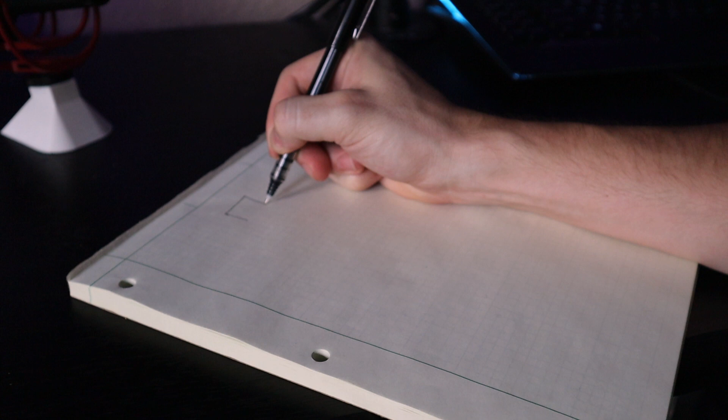So I'm going to want the mount to look something... well, I'm going to want the mount to be articulating, so the panel, I'll just model it off of like a wall-mounted articulating TV mount. And I'll put front view, side view, and they're all connected.

And then to put a bolt through here, you can't see that at all. Okay, that's a little better. Arm to come down, and then this is going to be where I mount it to the camera.

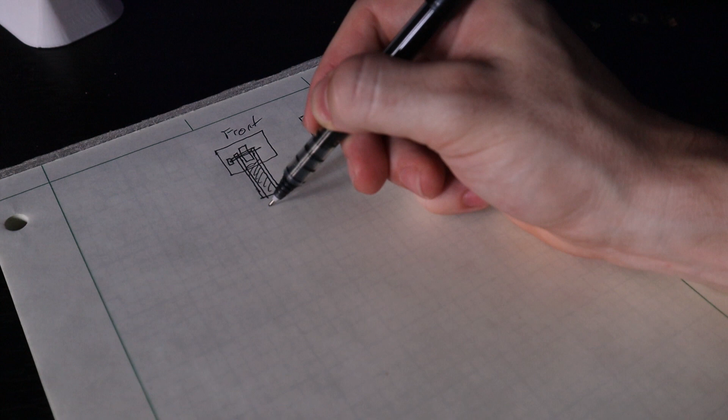And the camera mount, I want it to use the existing Canon mount that has a locking pin on it, and it has quite a small dovetail here. And this is going to need to be, and have another, this, and then the camera itself will sit here and do camera stuff.

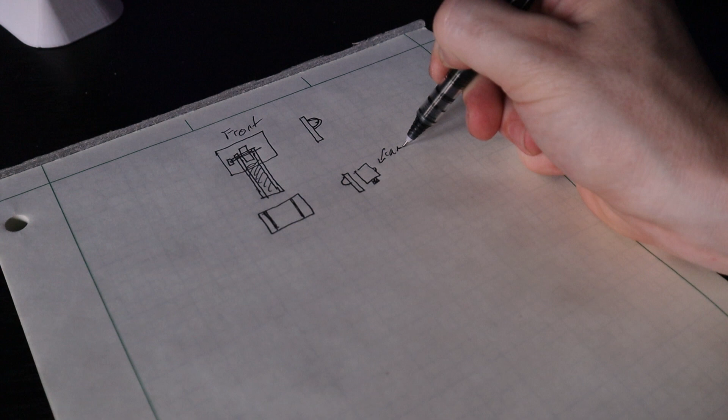I don't know if you can see that. God, I'm a bad artist. So I'm terrible at drawing, but I'm just gonna make it in CAD and I'll show it to you in 3D.

Before I get too deep into CAD, and while I still have some sunlight, there's a few things that I know I'm gonna need for sure. If I'm gonna have an arm and another arm that are gonna hinge, I need the...

So this is what I want. I want it to stick on the wall on this side, and then this be able to swivel here, and this top be able to swivel, and then right here is where I'm gonna...

It's where I'm gonna stick this mount, what the camera sticks onto. So I'm also gonna need a quarter 20 bolt for that.

Something like that. What I need from the hardware store is bolts that are going to replace the pin and the drill bit. So let's go.

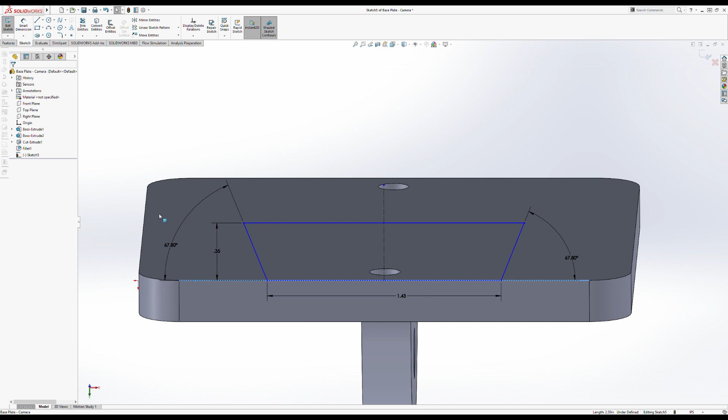Alright, I got it done. Everything is modeled up, and I got the hardware. The next thing to do is send it to the 3D printer, and probably wait about 9 hours for that to print out, which is gonna suck.

Look at that. Alright.

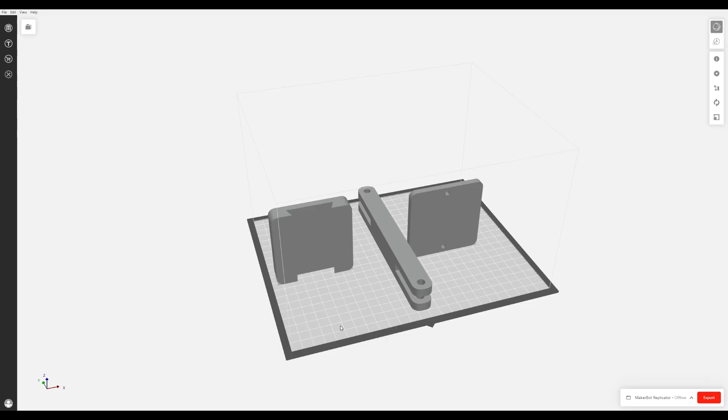Okay, so today is tomorrow since the print took literally 9 hours to do. It finished at about 4:30 this morning, so let's go check them out.

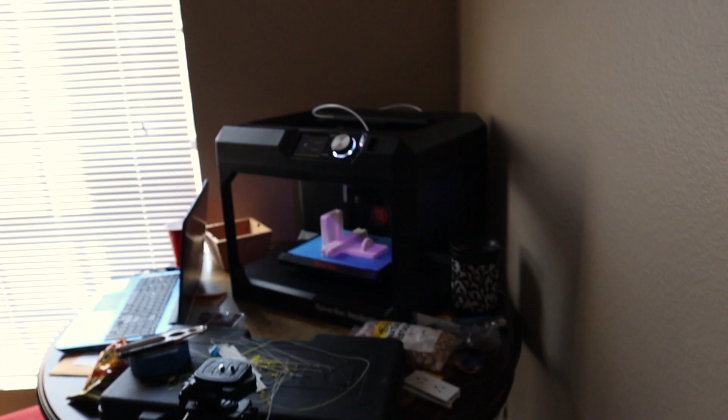Oh, dude. Woo. I got him.

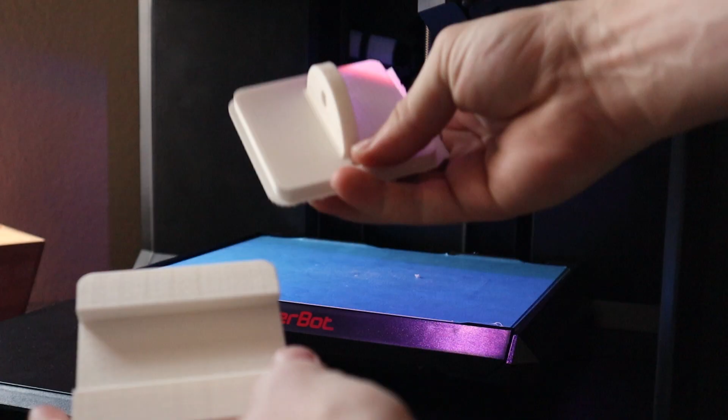No. It doesn't fit. It's just small. Damn it.

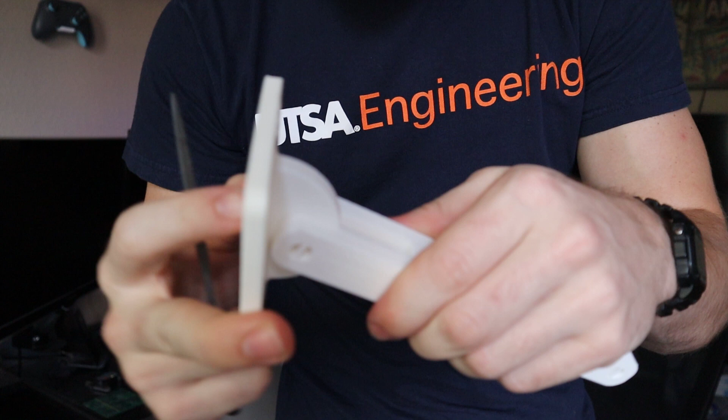Oh, but I think I can fix it. But real quick, look at how good these came out. Look at this. What's great is there's just enough bow in them that the bolt is gonna clamp it together, so that'll hold it in place. I just gotta fix this.

File in the drill. Alright, a little bit of an assembly. I've been using this drill bit just to knock out where the bridges were in these pieces. Gotta get the hardware.

Look at that. Wing nut with just enough room to fit. Oh, that's good. Friction. Cool.

Here, where do I want something? Cool. Yes. Well, look at that. It actually came together. Wow. Oh, check it out, dude.

So I got the thing to work and it holds up, it supports it. The only issue that I have is finding a stud. Now I know based on where the drywall screws are that there's a stud that runs here and the center of my computer is here. So there's a little bit of a difference. I don't want this thing to fall apart, so I'm gonna go ahead and put it on the stud as opposed to just putting it in the center with drywall screws. I hope future me is okay with that. So let's just screw into the wall and get this thing mounted.